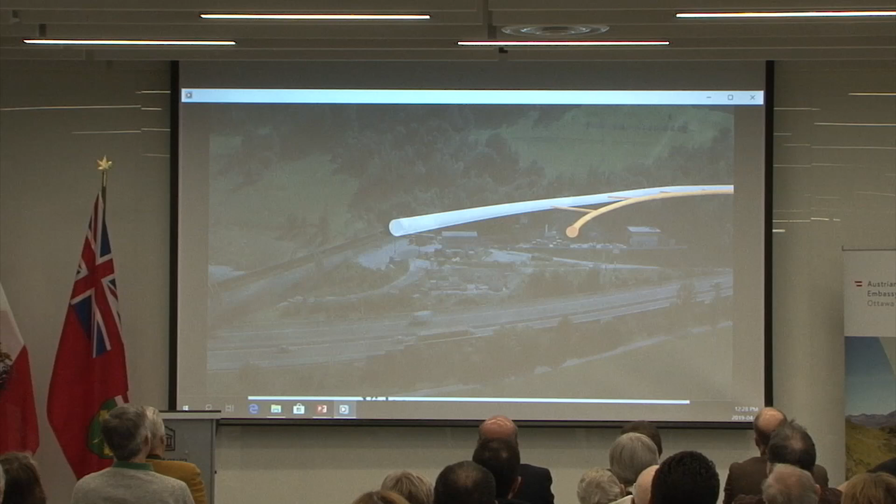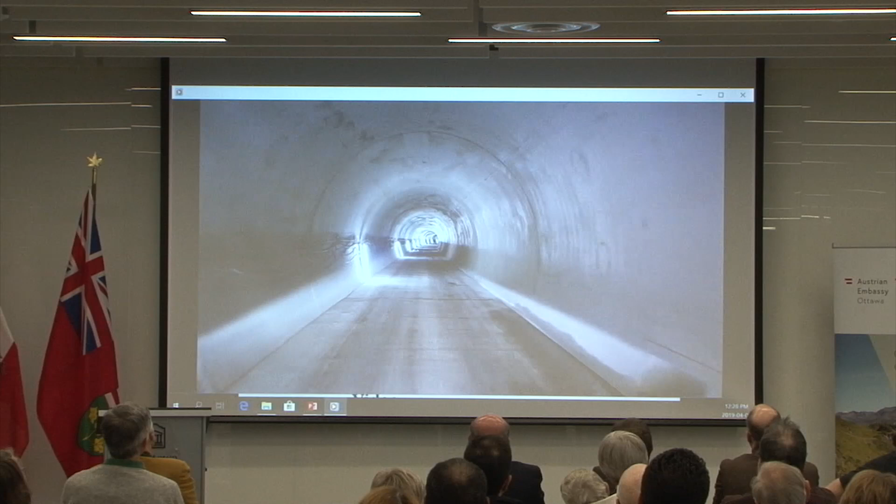Cross tunnels connect the bypass tunnel at 333-meter intervals with the new emergency tunnel, thus bringing the railway bypass tunnel in Innsbruck, operational since 1994, into compliance with subsequent safety requirements. This was the reason for constructing the emergency tunnel.

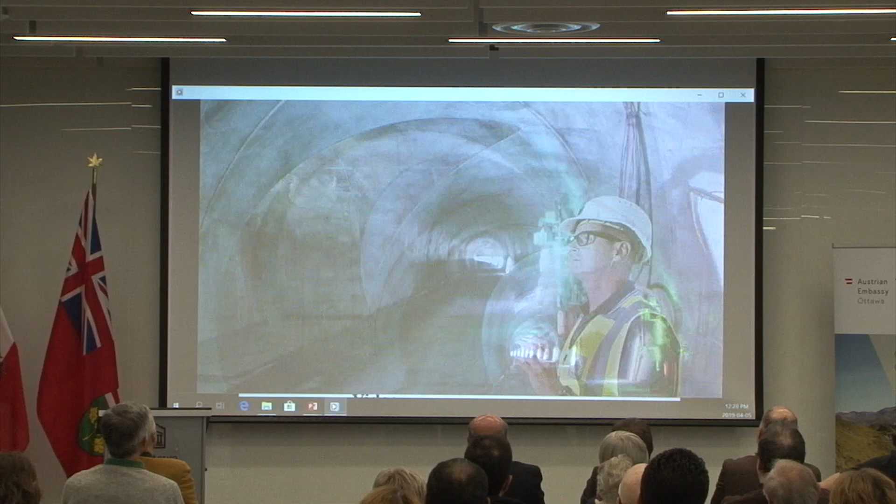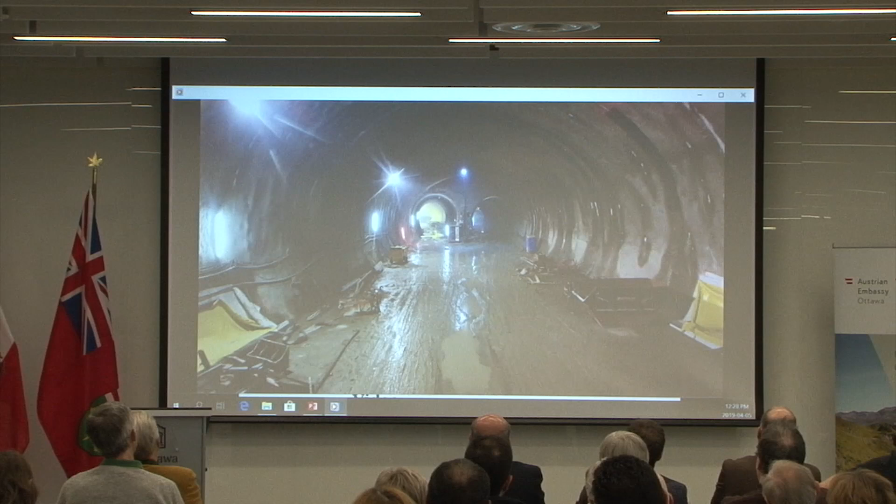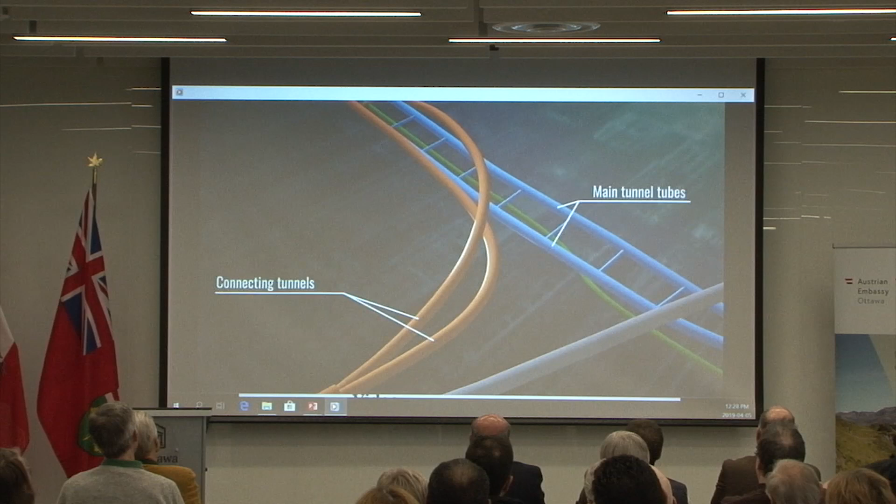Here, about 160 meters below the town of Aldrans, 2 connecting tunnels branch off from the existing railway bypass in the direction of the Wipp Valley. These two tunnels create a crossover in order to allow a fluid transition between the right-hand running used in Austria and the left-hand running used in Italy.

The two connecting tunnels took only 2 years to construct. The breakthrough took place in the summer of 2017, creating an underground connection between the Inn and the Wipp valleys. Times like these give the miners and their colleagues pause, and relief is plain to see on their faces.

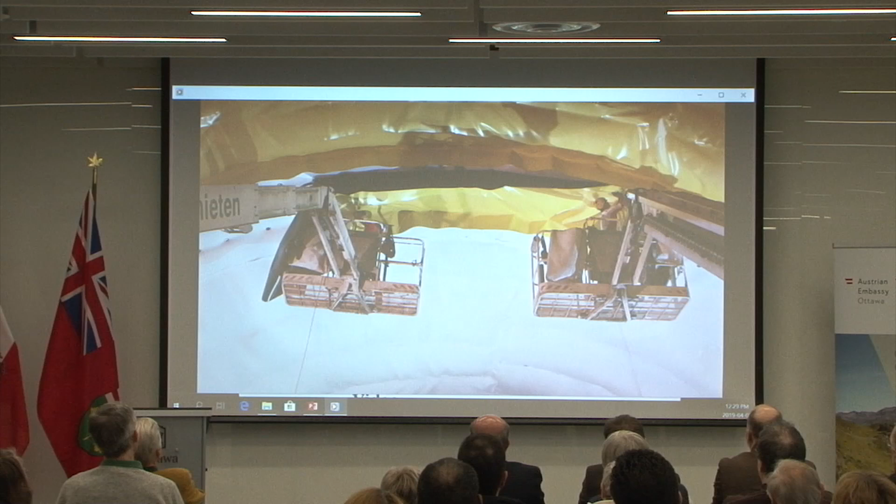Once the excavation works are completed, the internal lining of the connecting tunnels begins. Inflowing mountain water is drained off to the tunnel invert by means of an insulating film, keeping moisture away from the tunnel. The reinforcement is then assembled: in blocks of 12.5 meters each, lattice mats and steel bars are woven by hand into a mesh, which gives the concrete stability and durability.

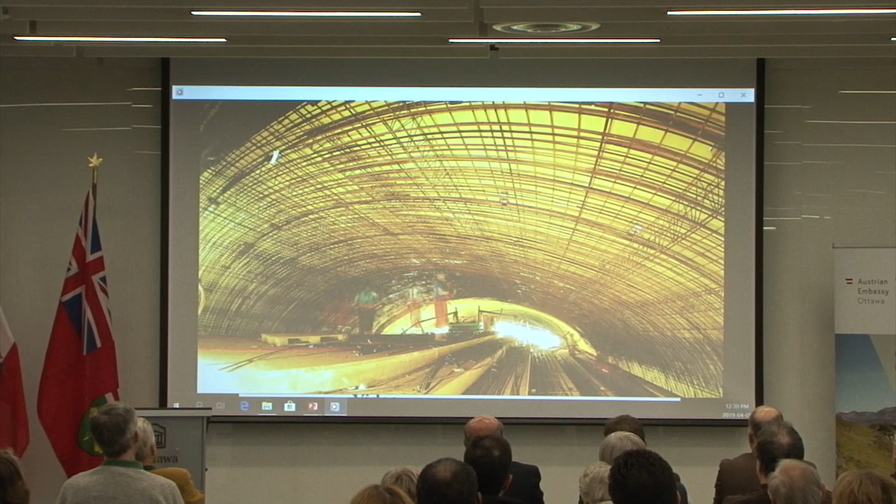The tunnel inner wall is then filled with concrete block by block using mobile carriage molds. The consistency of the concrete, the placement and compaction are precisely coordinated so that the concrete has no defects and reinforcement is completely embedded.

After the formwork has been stripped, the concrete is treated with a foil seal. This controls the temperature and humidity of the concrete and minimizes cracking.

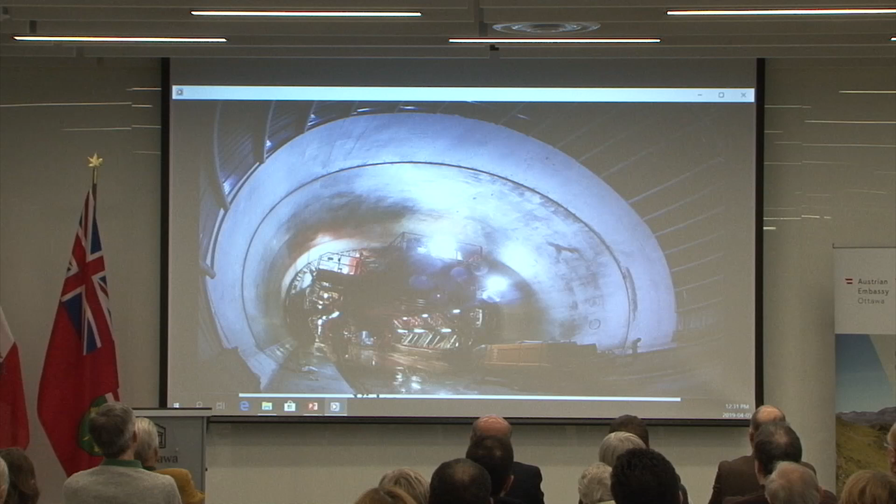For the first time in tunnel construction history, the Brenner Base Tunnel is being built to last at least 200 years.

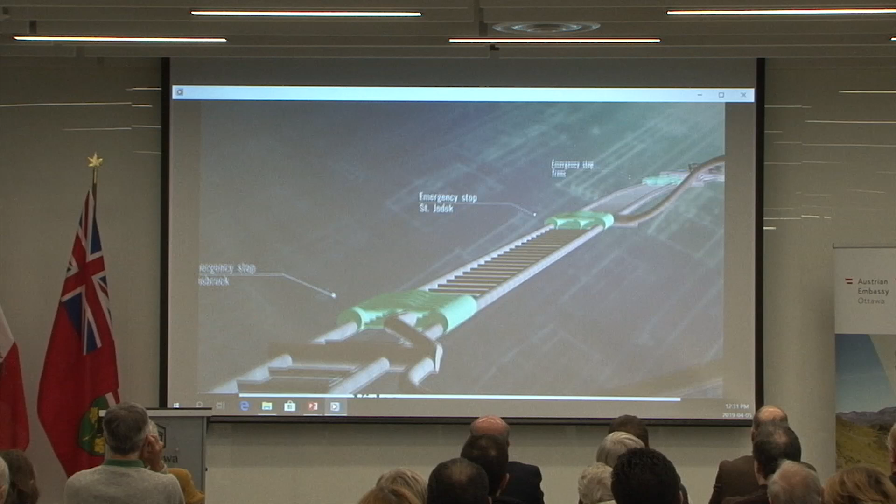The exploratory tunnel is located centrally between the two main tunnels and about 12 meters below them. This is where the first TBM in Austria territory was used for excavation work. Since November 2015, the TBM named Günther has been cutting its way through the rock, driving 15 kilometers of the exploratory tunnel towards Steinach am Brenner, starting from a chamber below the town of Patsch, which is connected to the surface by the Ahrental access tunnel. The exploratory tunnel provides information on the geological characteristics of the rock mass, and will therefore make the subsequent construction of the main tubes efficient, fast, safe, and cost-effective.

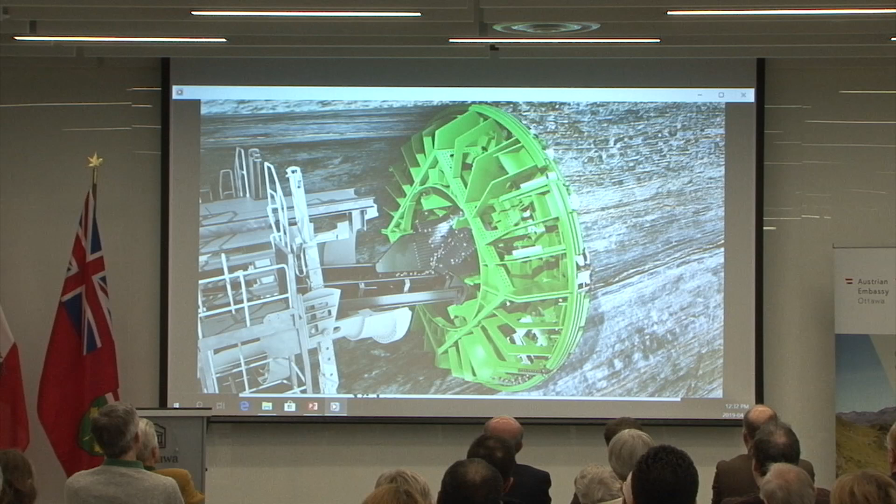The TBM is 180 meters long and has a diameter of 8 meters. The boring machine head is equipped with disc cutters, which rotate slowly and constantly, while the TBM pushes hard against the rock face, digging its way through the mountain.

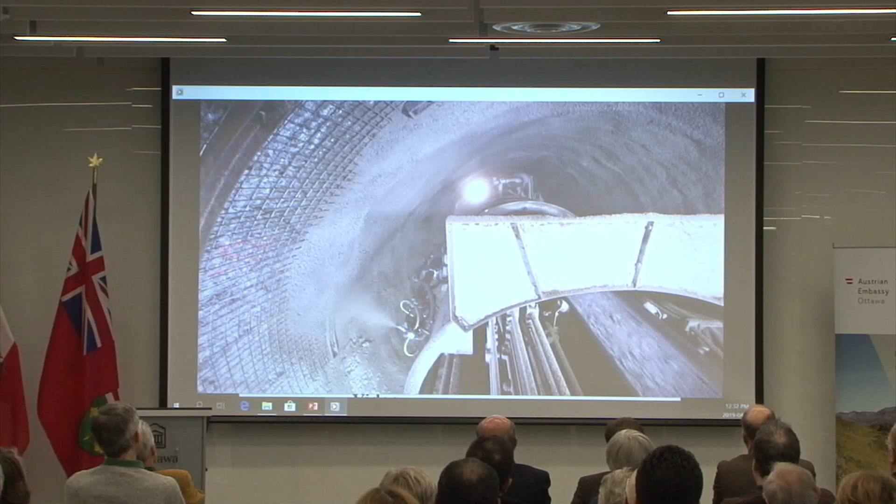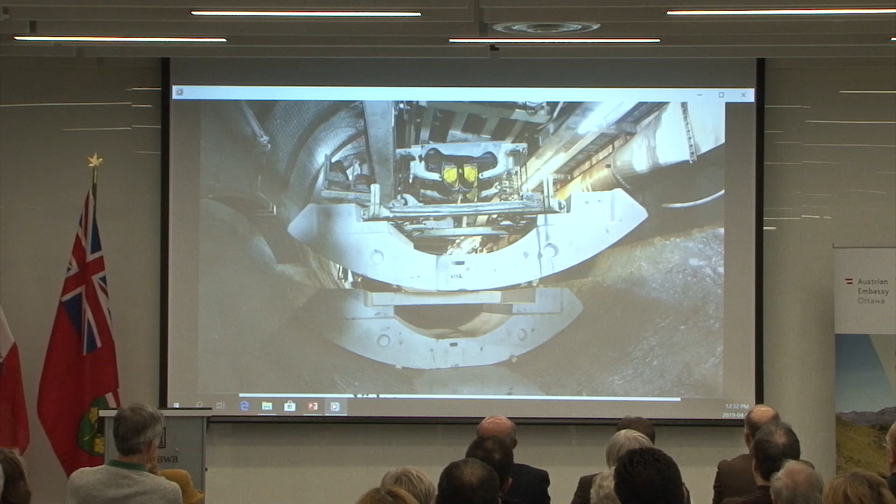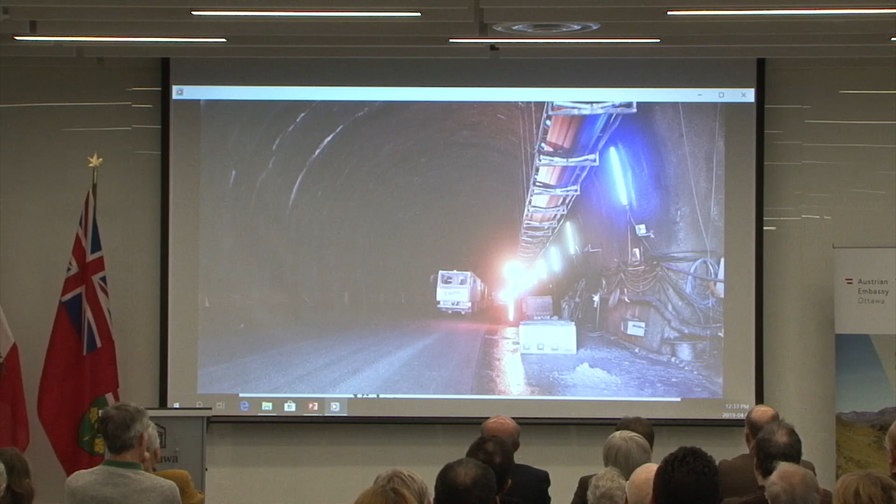The tunnel floor is built with prefab concrete elements, the so-called tubbing rings. Fully automated multi-service vehicles shuttle back and forth to the TBM to supply construction material, concrete, and prefab elements.

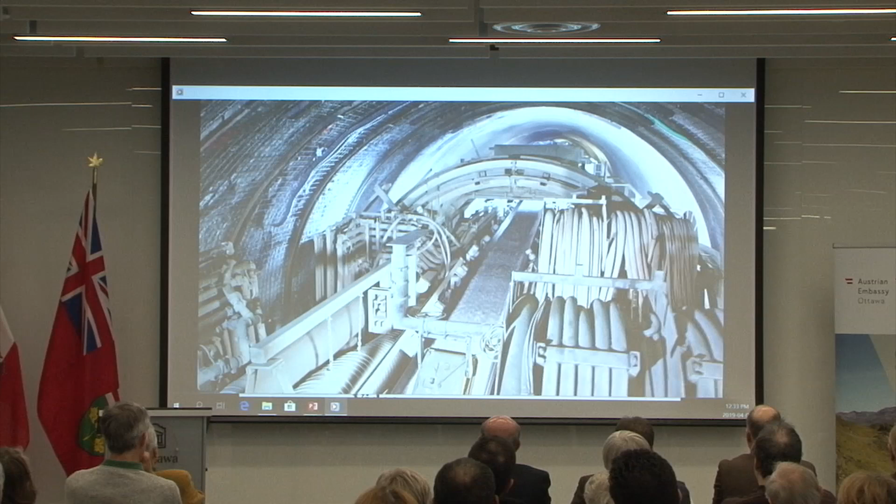Tunnel spoil is transported on a conveyor belt system. All material taken from the mountain must be returned to nature. Here in the Ahrental Valley, approximately 2.6 million cubic meters of excavated material will be relocated along the Brenner Highway. Great care is taken to ensure that the disposal site is embedded into the landscape in the best possible way, to create new available land in the future that will be gradually replanted and covered with green growing things.

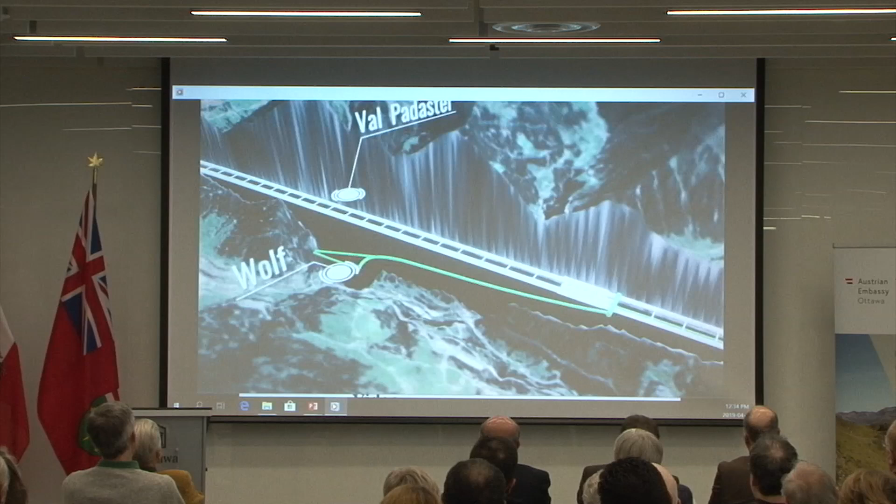Another construction site for the Brenner Base Tunnel is located in the municipal area of Steinach am Brenner, in the district of Wolf, where the Wolf construction lot was completed in the summer of 2017. The works of the Wolf construction lot, which included the construction of the 4-kilometer-long access tunnel, a large underground chamber, and 1.2 kilometers of the exploration tunnel, started in 2013 and were completed in the summer of 2017.

Subsequently, further excavation work northwards and southwards, the construction of the St. Jodok emergency stop and of the stretch of the exploratory tunnel towards the Italian border will start from here. Soon, several tunnel boring machines will be put into service at this site.

The largest disposal site for excavation material, the Padaster Valley, is also located in Steinach. After the completion of construction works and revegetation, this deeply cut valley will become arable land. The Padaster Brook will be rerouted to a new bed on the surface, and new wooded and pasture areas will be created. About half of the excavation material of the Austrian project area will be deposited here. The excavation material is transported to this disposal site using underground conveyor belts, and the local residents hardly notice it.

People always ask me, what are compensatory measures? Working in BBT SE, we are aware of the effects of major construction sites. Therefore, we do a lot to compensate those impacts. And this is also why we finance and implement significant improvements to habitat and nature in our project area.

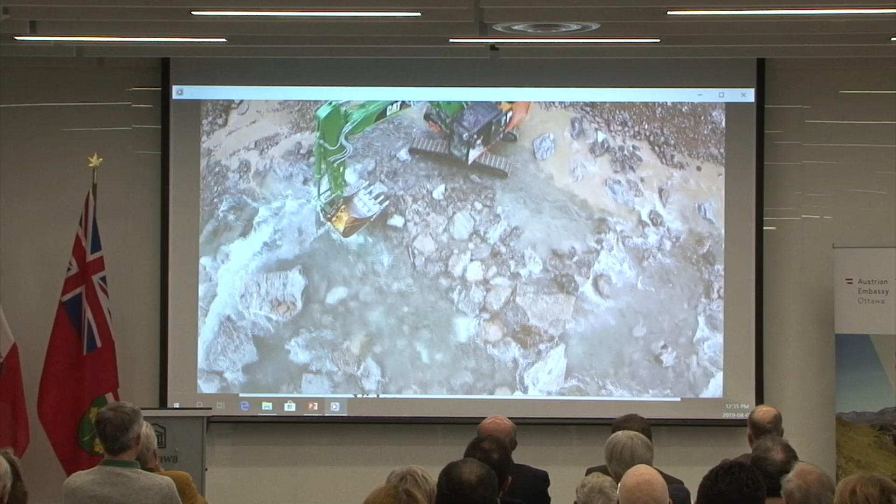Habitats, wetlands, and moorland are revitalized and expanded as recreational areas for the population. The river courses of the Isarco River and the Marita and Sil brooks are being rerouted. This means fish can swim upriver again and reach their spawning grounds, and these mountain brooks will regain their original characteristics. In the next few years, a total of 250 such compensatory measures will be implemented.

In the BBT tunnel world in Steinach am Brenner, near the valley station of the Bergeralm ski slope, information about and closer glimpses of the major Brenner Base Tunnel project are available throughout the year. In 800 square meters of exhibition space and in the display tunnel, you can experience tunnel construction in a fun and instructive way and get the latest information about the project.

Not far from the tunnel world, the new circular walking path in the Padaster Valley offers a spectacular view over the disposal site and provides information on the spot about the site and the nature-friendly measures which were carried out.

Once a year, the tunnel construction sites in North Tyrol and South Tyrol are opened for interested visitors, such as in October 2017, when thousands of visitors got the chance to see the fascinating world of tunneling up close on the Ahrental, Mauls and Isarco River underpass construction sites. Employees of BBT explain facts about tunneling, geology and topography. Tunnel tours make it possible to view the work in progress in the project area. A special entertainment program for all ages makes the open tunnel days a special experience. And who knows, perhaps someone will have the chance to find their true calling.

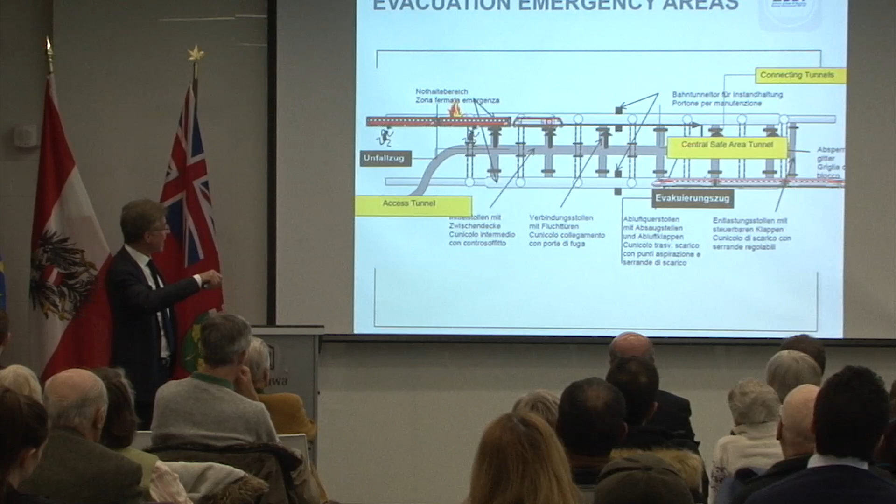If a train runs into the emergency zone with a burning fire on the train, then the passengers can go out and walk to the central safe area, and another so-called evacuation train can come and pick them up. With our specific access tunnel directly connected to the central safe area, we are able to take the passengers out also by car, and this is a big advantage.

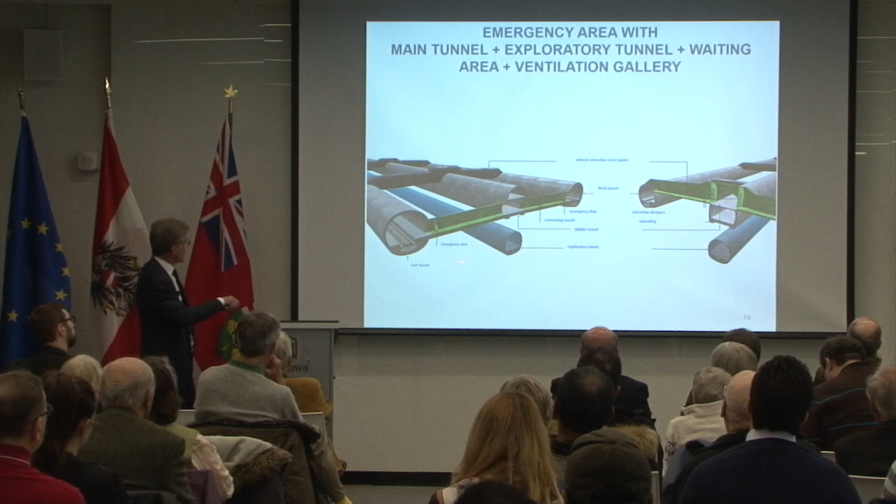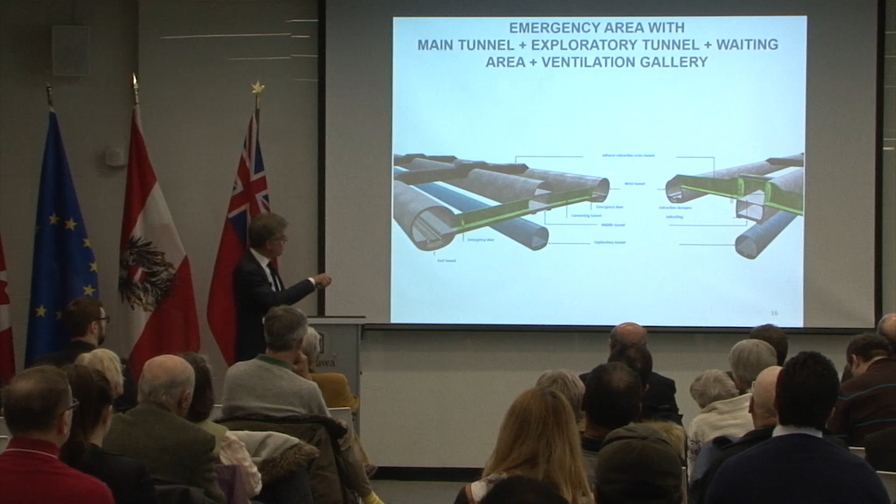You see it in another layout over here. It's quite complicated from a geotechnical standpoint, not an easy system. But nevertheless, this is the exploratory tunnel, the main tunnel, and the cross passage tunnel, every 333 meters, and specifically in the emergency zone, every 90 meters. Then we have in the middle the so-called safe area zone, and above them the ventilation system, which extracts air or smoke coming from a possible fire and so on.

Now, the rail equipment is another big issue. It is a very easy task on one hand. On the other hand, we have to prepare the tunnel layout also for the future, for upcoming technologies. Therefore, we try to have the carriageways laterally on the same level in order to implement, probably in the future, also some magnetic system.

Or there is the so-called electrical supply, and there are different voltages. In Italy, 25 kilovolt; in Austria, 15 kilovolt, 16.7 hertz, different frequencies and so on. And this makes life a little bit more interesting.

Now, the main data are 64 kilometers length. The total length of the whole tunnel system is 230 kilometers, with a maximum overburden of 1,800 meters—you don't feel that if you are in the tunnel. The maximum speed of the freight trains will be 120 kilometers per hour, and the passenger trains 250 kilometers per hour.

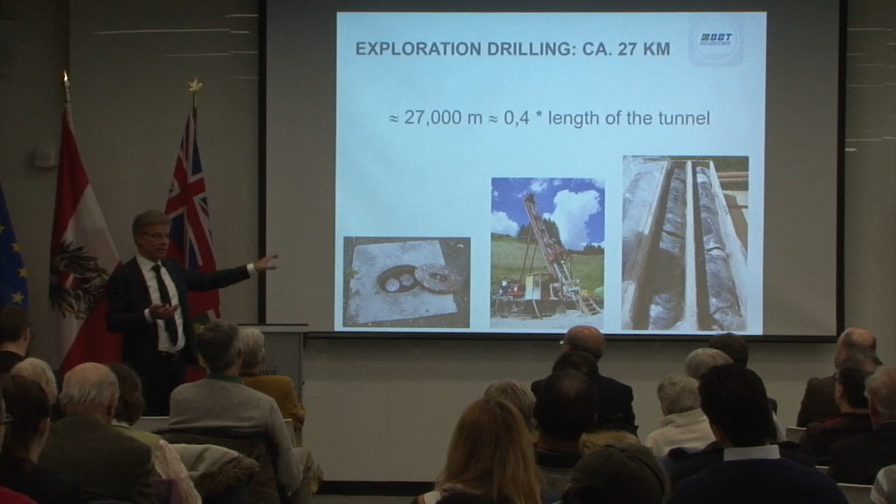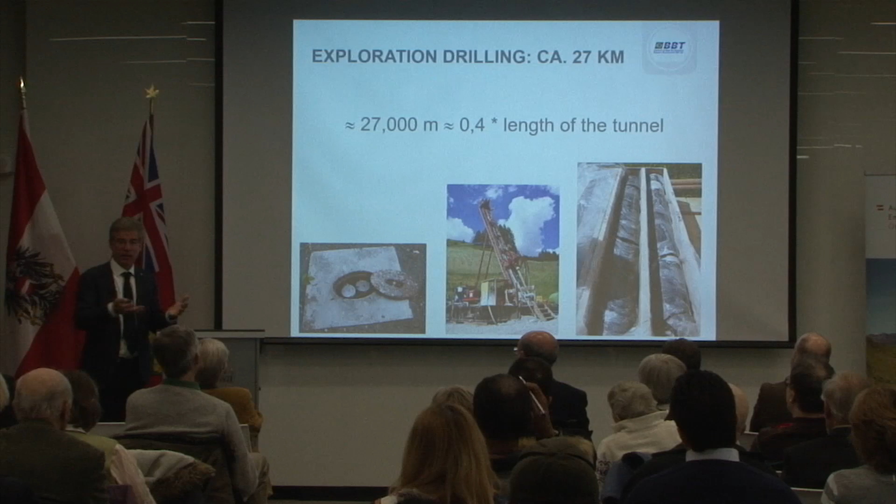27 kilometers means approximately 40% of the total tunnel length have been drilled vertically. I did some research comparing other projects. In the Gotthard tunnel, they did approximately the same vertical drillings. In the Semmering tunnel, having a length of 27 kilometers, they did almost 90% of the total tunnel length. So it depends on the complexity of the rock mass and also on the financial possibilities.

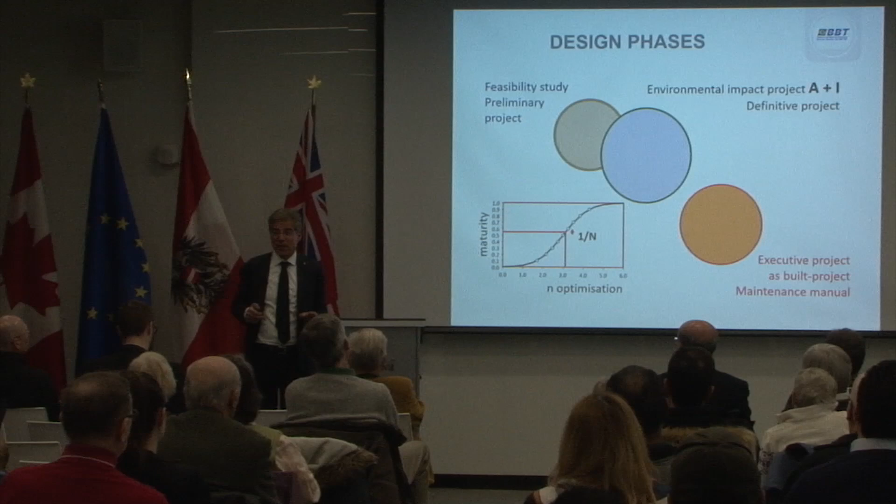Now this is more related to the engineering world. In a normal project program, you carry out the feasibility study, the preliminary project, the definitive project, and the executive project. We developed a guide design phase between the so-called procurement phase and the definitive project.

We had different environmental measures in Italy and in Austria, different philosophies and so on. And I came up with the idea: what can we do having different design procedures in both countries?

So we developed our own design procedures, our own guide design on the basis of a holistic approach, including not only structural safety, robustness, and serviceability, but trying to include also the maintainability, the life cycle management, the environment, the society, and the social performance.

And we came up, for the first time in the world for a big project, with a life cycle approach, including the different cycles of maintenance, of upgrading, and so on. We developed our own design procedure on the basis of a service life of 200 years.

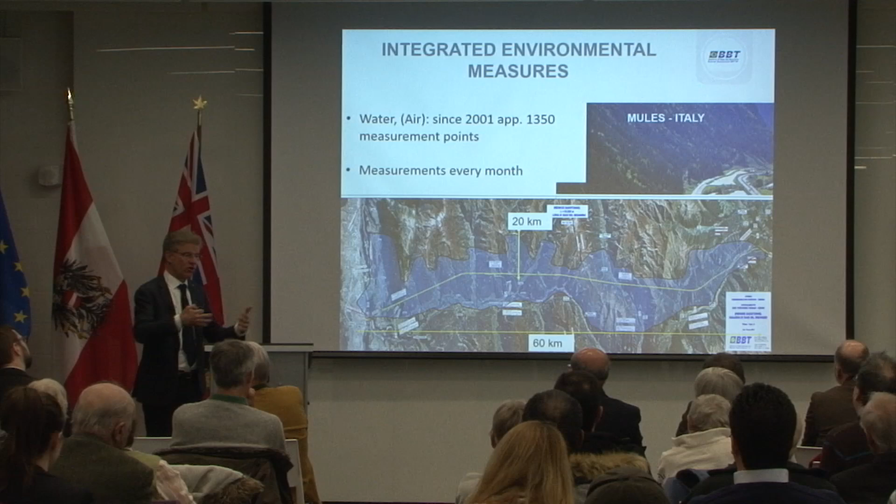And I was very surprised, and I'm still surprised, how precisely they can detect in the tunnel, having an overburden of more than 1,000 meters, from which water resource the water in the tunnel is coming. It is amazing for me how precisely they can distinguish the composition of the water in the tunnel.

We are doing the measurement on a monthly basis. We deliver the data every second month to the authority. The geology.

2/3 of the total exploratory tunnel, approximately 40 kilometers, have already been excavated. So we know a lot about the geology, and we know a lot about the aggregates and the composition of the stones.

But now the problem is that we have, on one hand, tried to reduce the disposal areas and the disposal volume. We want to reutilize the excavation material as a building material, which is also the basis of sustainability. We have finally been able, together with universities and 5 PhDs, to work out a system, a proposal to recycle the schists with a uniaxial compression strength which is quite high, 75 megapascals.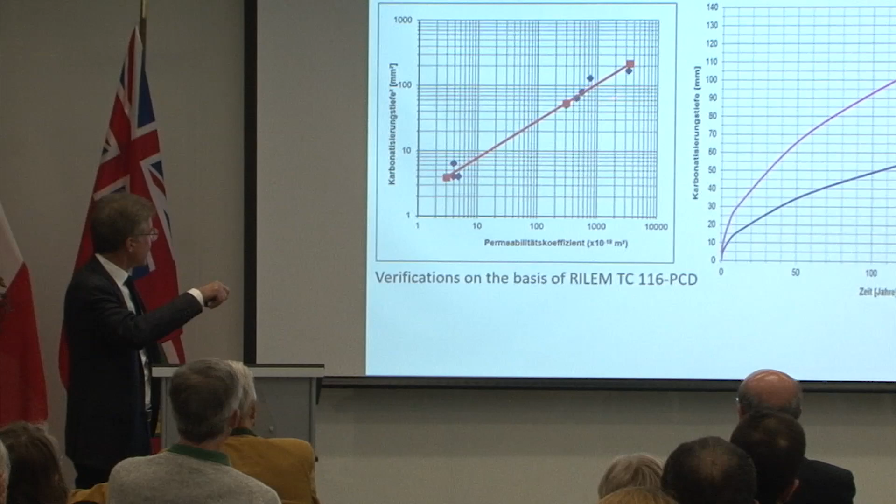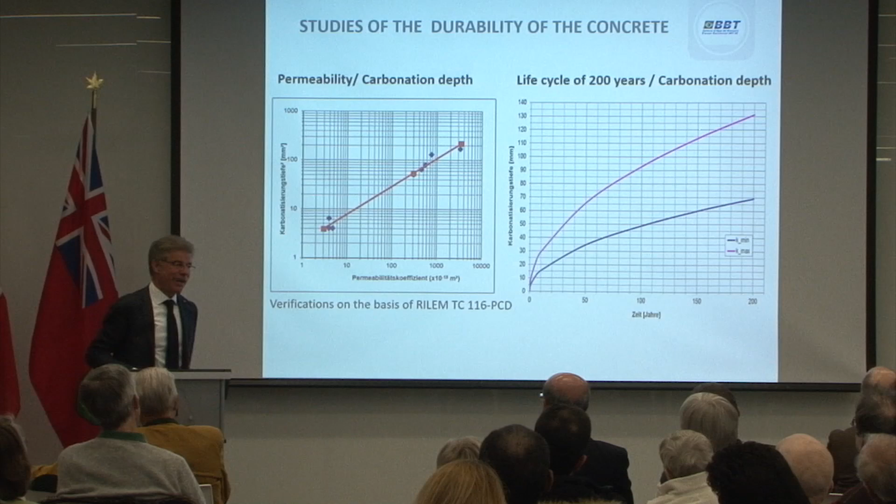We did a lot of intensive study on that, and we came up, on the basis of Fick's law, with the ability to analyze the so-called carbonation depth, which is very well known in bridge design, chloride penetration, and so on. So what is the main objective over here?

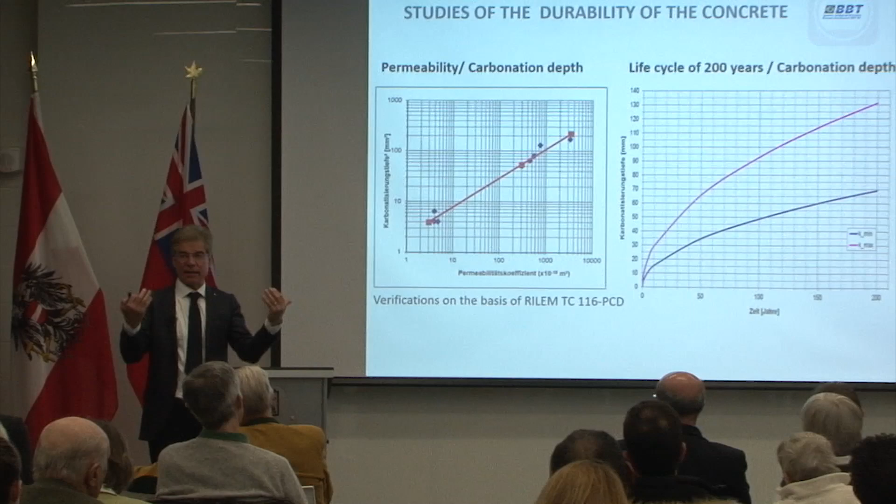The main objective is to have a very dense concrete, but it must be produced in a way that the concrete itself still has a certain flexibility when exposed to fire, since you need a certain volume of pores there in order to have a certain elasticity.

Now, 5 million cubic meters of concrete have to be cast. 60% of that cast in place, 20% for linings, and 20% for the sprayed concrete, approximately.

So quality control is very much needed. The companies have their own laboratory. We are relating also to the local universities. We are trying to involve their laboratories, and we do have our own laboratory in order to be able to prove at all times the quality of the concrete itself.

Costs. Approximately 8.5 billion euros is the cost of the total tunnel. We have been able to keep the costs stable for 12 years, and I'm sure we will keep the costs stable also in the future. The tunnel structure itself costs approximately 60%.

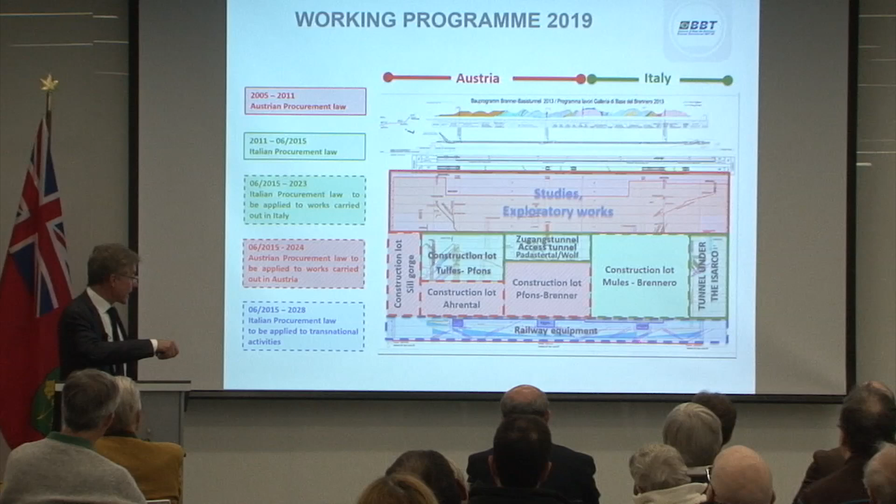Working program: the procurement has been done first in Austria for the so-called first phase, then on the basis of the Italian procurement law, and finally some construction lots are now also tendered under the Austrian procurement law. The so-called railway equipment still has to be tendered next year.

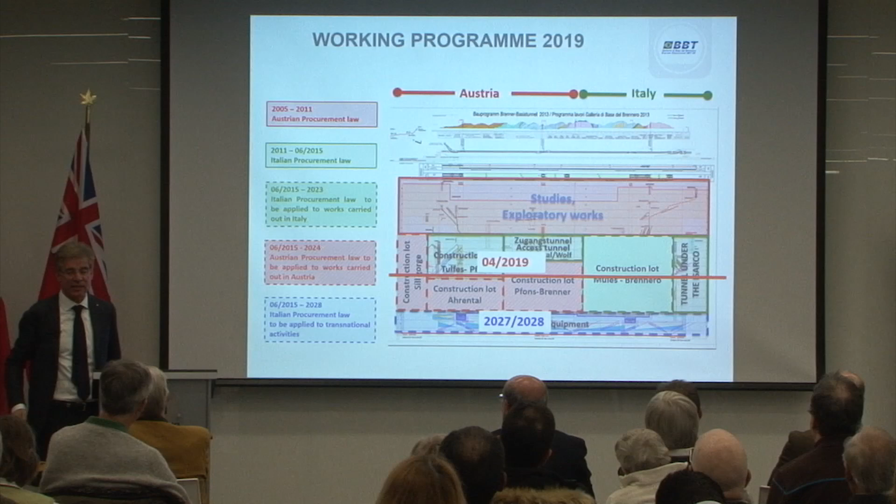We are not going into detail here, but we want to finish our work in 2027, and we reserved one year for the so-called pre-exercise phase, in order to train the rail system and try to promote it. So what did we learn until now?

We learned that in order to promote such a project, and also to promote a project in a city, you need a coordinator. The coordinator must work as an accelerator, together with some international experts, otherwise people don't believe them anymore. This is a big issue.

Then you have to have a vision for the next 20 to 50 years. You have to have a communication strategy and a strategy for environmental protection. It is very important to work out a technical guideline, including life cycle management, cost and risk management, and specifically for infrastructural projects, to have a clear vision about intermodal and multimodal mobility and how to change the modal transportation systems, and so on.

Another 7-8 minutes: 40 kilometers of the exploratory tunnel have been built, 100 kilometers are excavated by the end of May this year. Then we have to go further. We will be able to excavate approximately 20 kilometers this year across 4 construction sites.

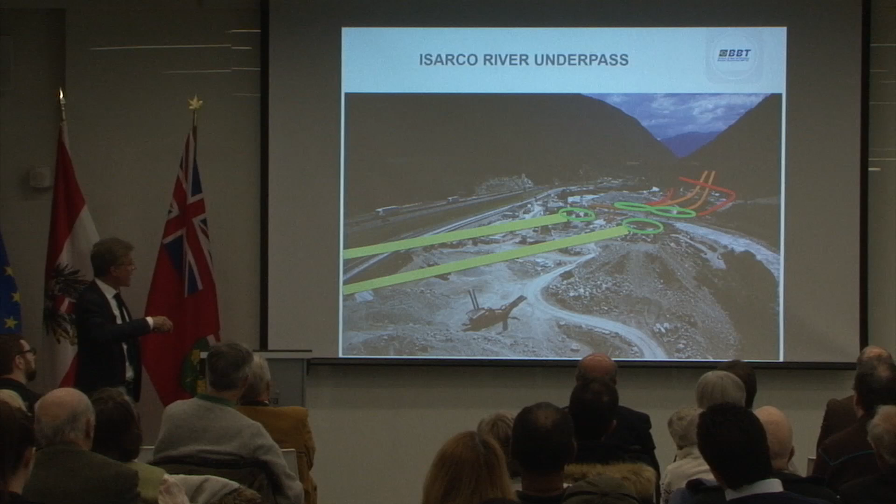A very interesting construction lot is the underpassing of the highway and the river Isarco over there, by creating vertical shafts and using freezing technology. So we are underpassing the traffic infrastructures and the river itself by using this kind of technology.

Now, optimizing drilling innovations, we developed our own system based on the so-called performance-based excavation methodology. We have our own geologists who go on site daily, staying in the tunnel 8 hours, trying to work out how the mountain, how the rock mass behaves. They interpret the behavior geotechnically and transfer the data to the back office.

I was using a sentence from Confucius, who said wisdom, compassion, and courage are the three recognized qualities of men's decisions in tunneling.

This is a small drawing of what the geologists are doing. We use boreholes, drilling a hole in order to see how the rock could behave. We also use scanning methodology to have a 3D imaging of the borehole, doing some laboratory tests, trying to figure out the fault zones. Finally, this cannot be done if you use a drilling machine.

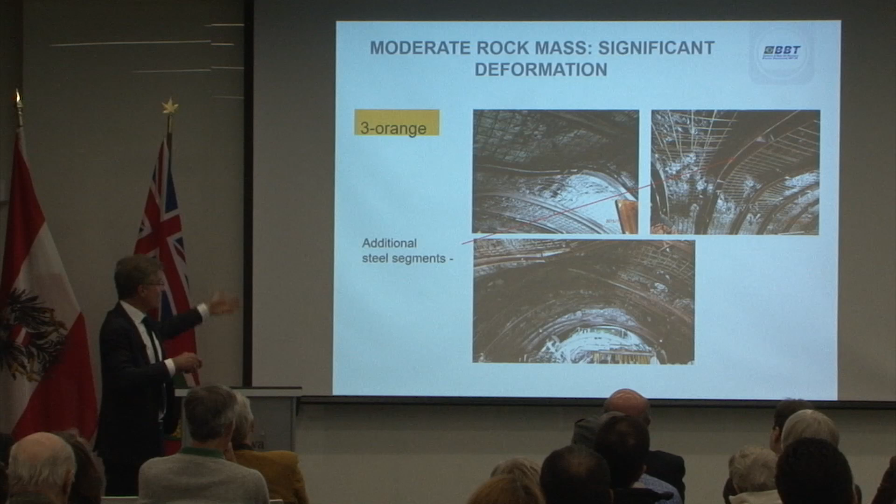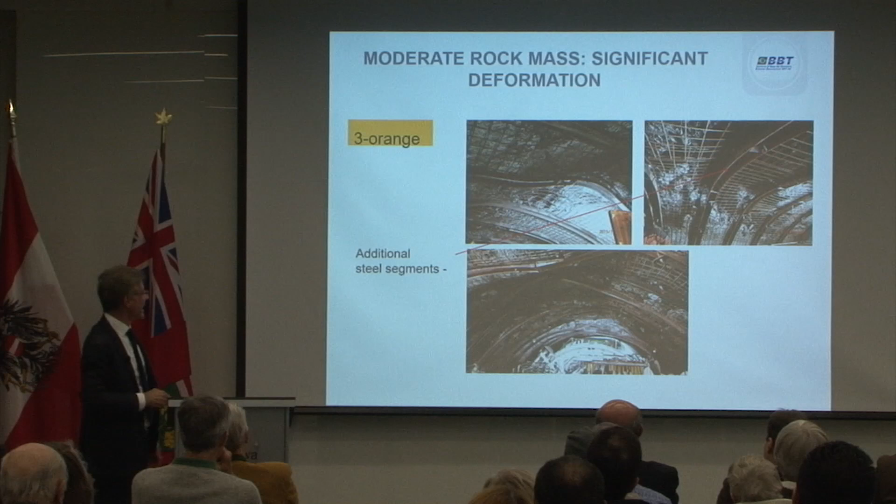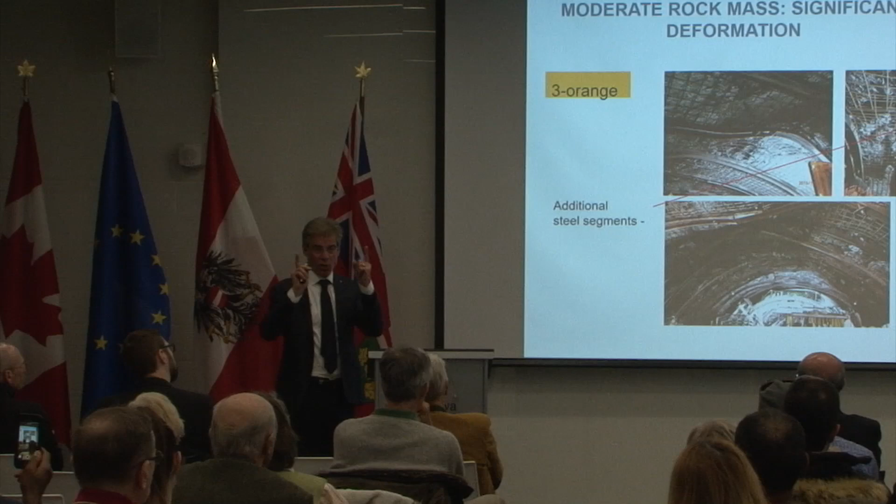Now we classify the rock mass into 4 categories: the green one, only with a little bit of support; the yellow one, which needs some additional rock bolts; the orange one, as you see over there, where the rock behaves quite heavily, able to deform the steel arches very well. And if you are in the tunnel and you hear the breaking, the failures, and you know you have more than 1,000 meters above you, it is a quite interesting feeling.

Then I developed a very specific post-compressible steel arch system for very heavily pressed rock masses.

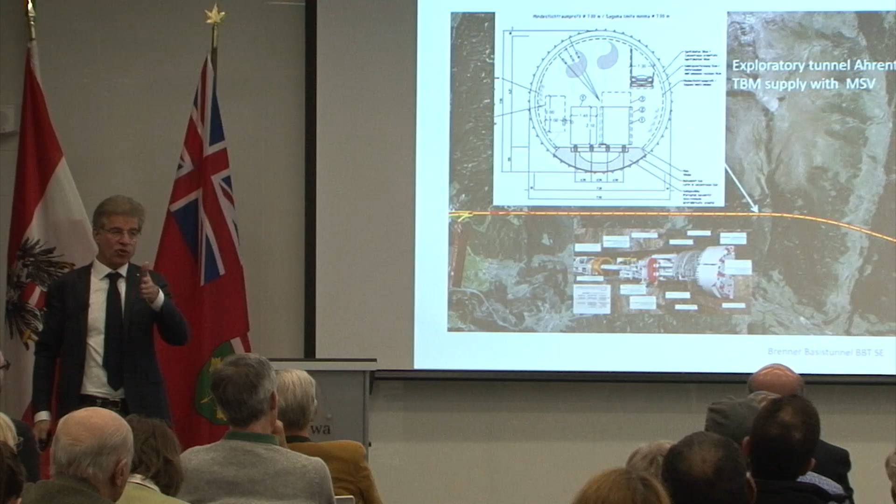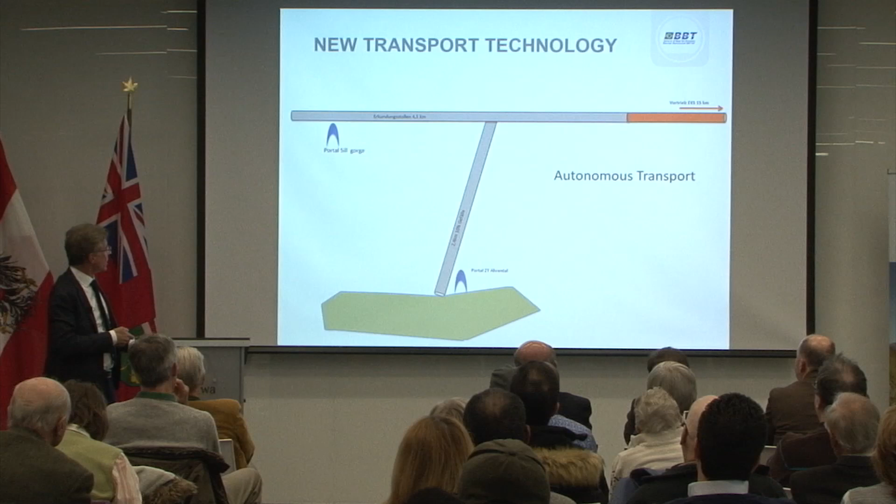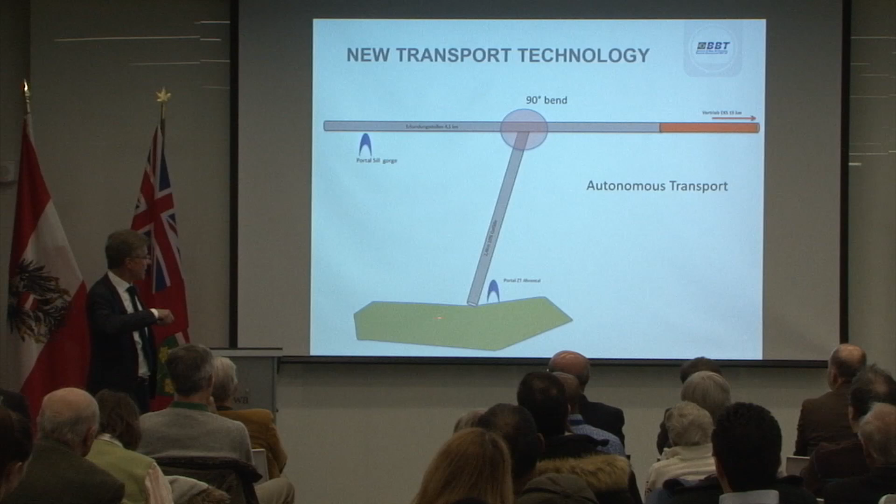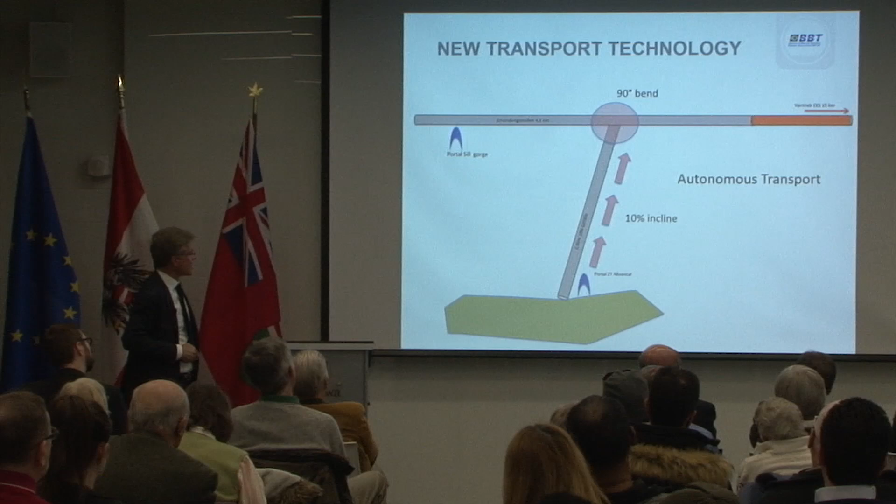Another short innovation, and then we stop. We had the situation where we had to bring material into a tunnel with a total length of 18 kilometers. In traditional tunneling, you use rails or some tracks. The idea was to develop a so-called autonomous transport vehicle to bring the building materials, crossing the access tunnels, turning around by 90 degrees and going along the 15 kilometers of the so-called exploratory tunnel, which has different slopes as well.

This was a special vehicle developed by a Swiss company. It can form a big chain of vehicles, and we were able, for the first time in the world, to transport 90 tons. Before, they had only been able to transport approximately 30 to 35 tons. With newly developed machinery, we were able to achieve that.

And then we started to use them also as an autonomous material transport system. You will see that on the film. We started that experience last December, without a conductor. There is nobody there.

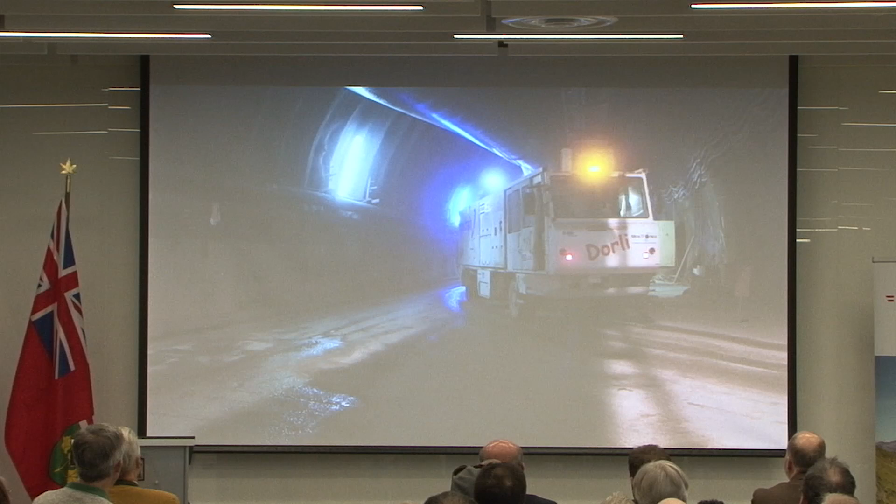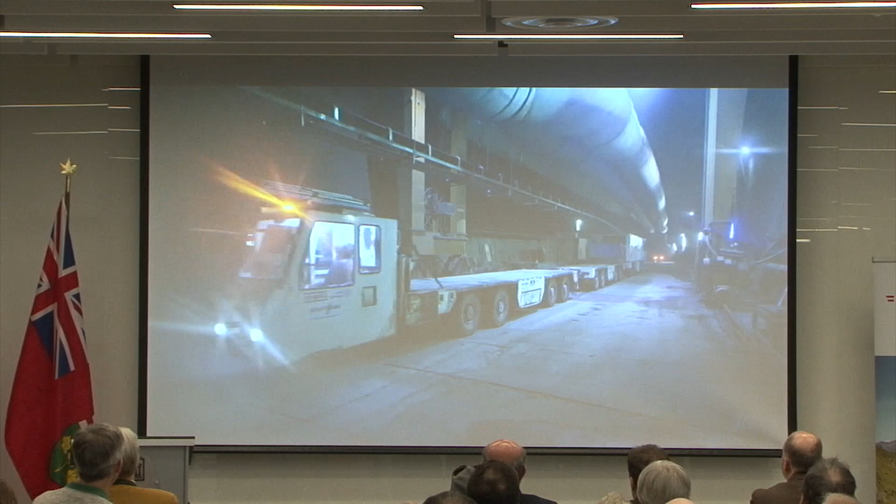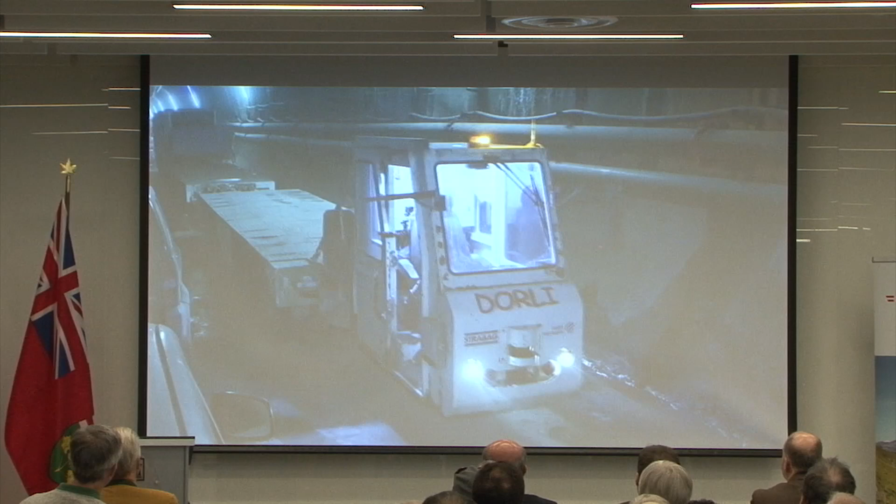Stops on the street light. That's around the curve. The velocity is approximately 23 kilometers per hour. Comes close to the big machine. Goes into the drilling machine. Distance over there is 25 centimeters.

So this was a first try. We wanted to start that already 3 years ago, but the safety inspector didn't allow us that. So we had to do a lot of measurements, a lot of research, and finally we have been able to promote it. The last topic I'd like to talk about a little bit is communication.

My proposal was always that we have to communicate on each level, on the so-called young people level, on the family level, up to the scientific level. We have 3 information centers, open 6 days per week, with more than 25,000 visitors per year.

We are trying to promote the project also locally through the news channels, information centers, open tunnel days, some internet portal, and the so-called Brenner Corridor platform, which is nothing else than a platform to promote measurements for the future. A very important issue is that you have to integrate the local traditions.